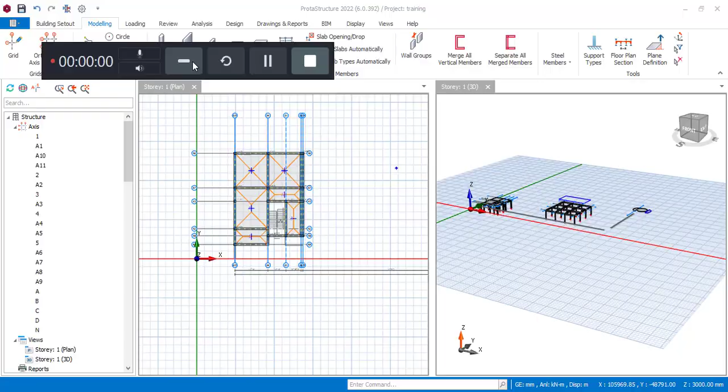On this episode, I'm going to be showing you how to insert your stories, the number of stories to specify whether it's a 2-story, 3-story, 4 stories, like that, and also how to edit these stories and how to generate your members to other stories. So I'm going to be taking you through that process right away.

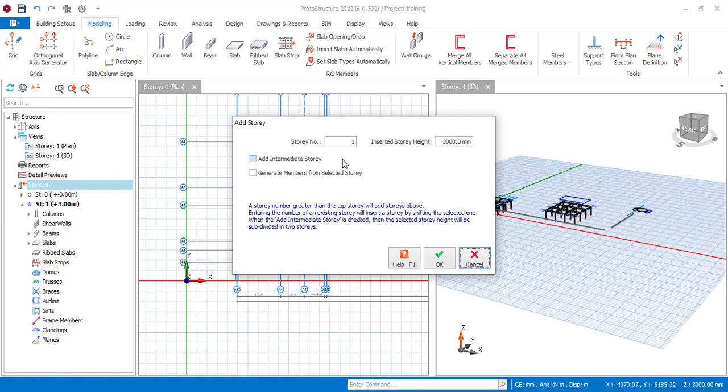So to insert your story, all you need to do is to click on this story, and then you right click, then you click on insert story. But now ProtaStructure sees your ground floor as story 1, it sees your first floor as story 2. So for us to design one suspended floor, we have to type in 2. So it's going to interpret this story 1 as our ground floor and story 2 as our first floor.

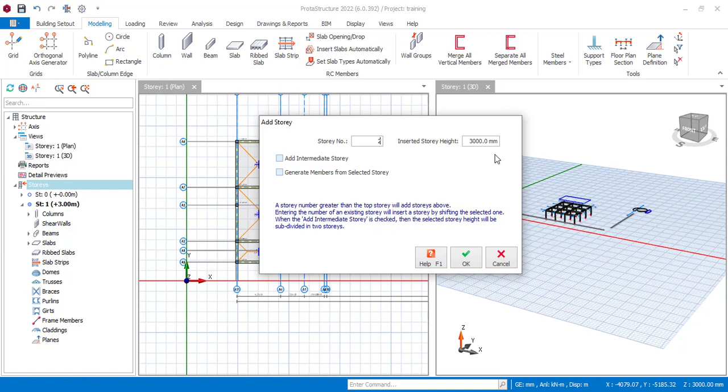Okay, so add intermediate story, generate members from selected story. I'm going to be showing you that as we proceed in the training. Okay, so I will click on OK and I will click on yes. So once I click that, you can see here it's showing me story plan, story 2 plan. Okay, so I will double click on story 1 to bring back that model which we have done. It's actually in story 1.

Now if I click on these stories and I right click, I can come to edit story. When I come to edit story, I can specify the depth of my foundation. Now mind you, the depth of your foundation comes mainly from the soil report, which will determine how deep you are going with your foundation, or sometimes based on the number of stories.

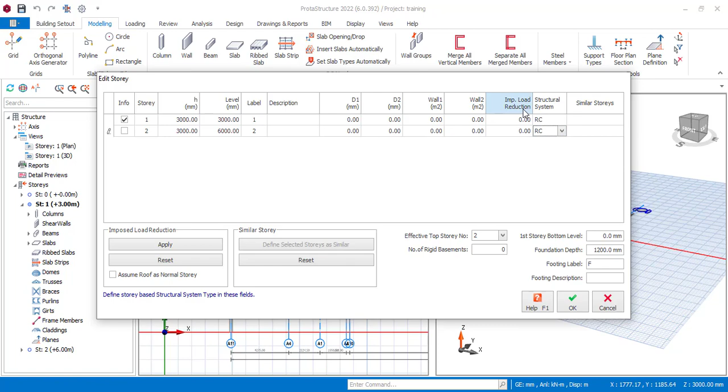But this building, mind you, is a reinforced concrete building, and that is why we are leaving the structural system as RC. Here also the structural system is RC. Okay, so I will just click on OK. Once I click on OK, it brings me back here. You can see I'm still on story 1. I can generate all of these members and take them to my story 2.

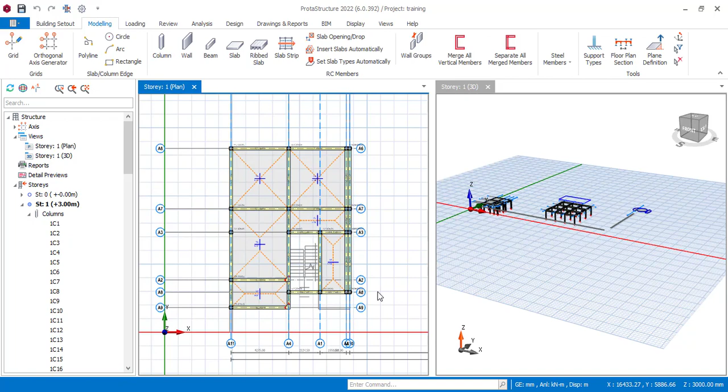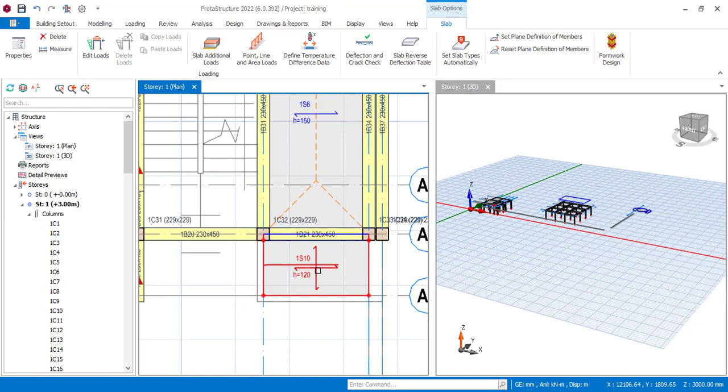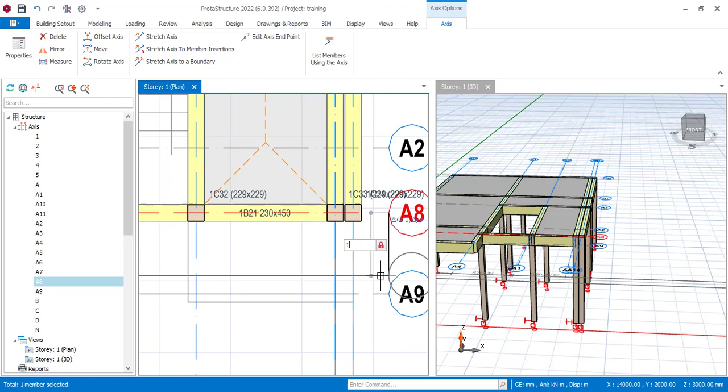But then let's say, what if I have maybe a small cantilever here? I can introduce that. Let's say this is a cantilever. I can insert a slab here, simply just insert this, and then I have my cantilever. Here we go. You can see it here. However, there are so many ways to achieve this, because there are cases where it may not be as large as this, or where the width of this cantilever is just, let's see, 1000, for example.

Mind you, whenever you want to offset, make sure you take note. If you are going down, it's always negative, so it's going to be minus 1000, and then I will type in and click enter. Now you can see what I have here. Minus 1000 is what I have here, so I can simply just insert.

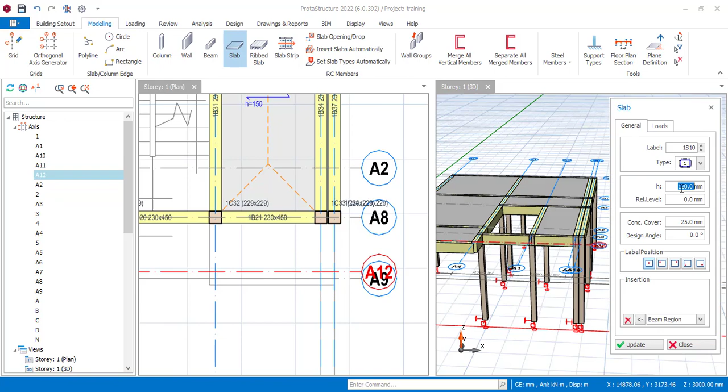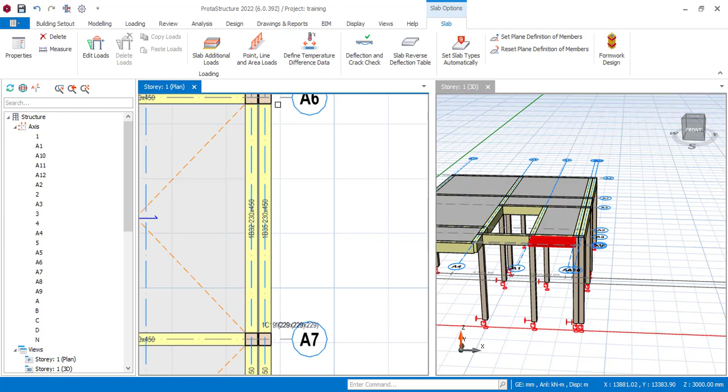Now it's easier for me to insert here because I have this bounded here, because I have axis here, I have a grid here, I have grid here, I have grid here. There are cases where you may not really have grids bounded in this way, and in that case it may become a bit more difficult or more complex to achieve your axis.

In that case, you can achieve it in so many ways. Actually, you can as well just stretch this, you know, it's a model. You can use the software to actually do modeling. And in the place of modeling, the pattern you may adopt may be different from what I will adopt, but the basic thing is for you to have the proper result, okay, which is the major thing.

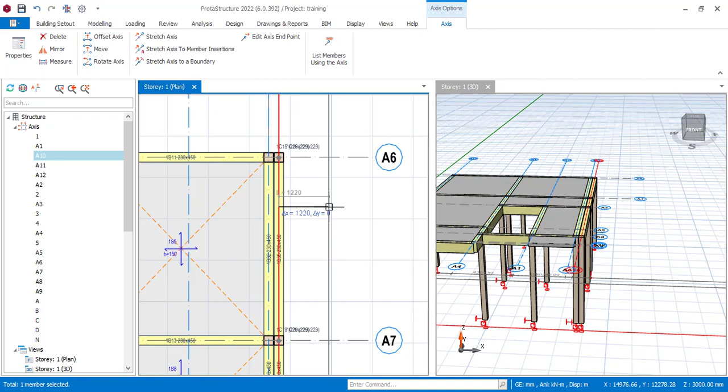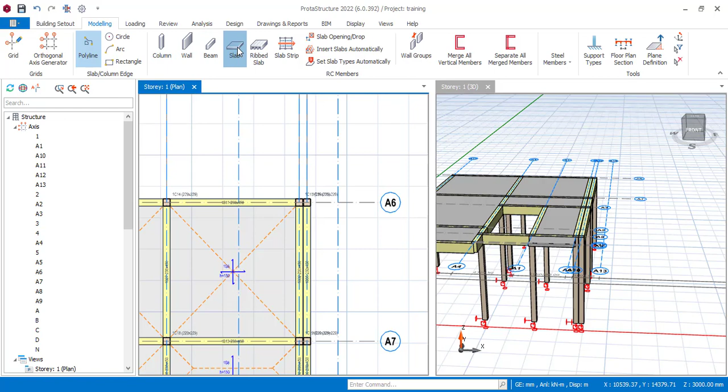Okay, for as long as your modeling is right, the software will be able to interpret it properly, analyze it properly and design it for you. So you can achieve that. But in a case where I encounter a more complex one, I'm going to be showing you while we still proceed in the training. But you can see all of these still look very simple and easy to insert your cantilever. It's as simple as that. You can just insert this as a cantilever. Okay, so that is that.

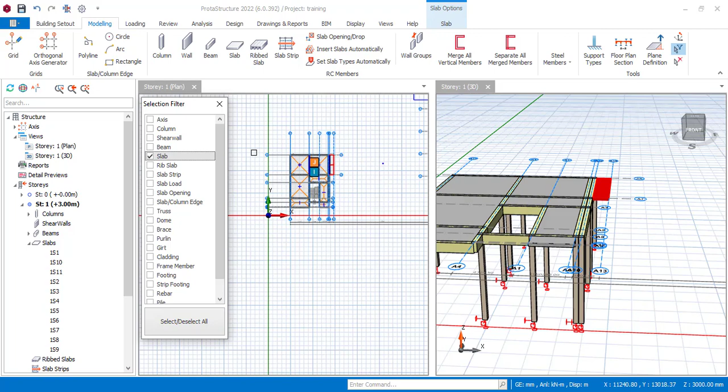Now you can see we have inserted new panels. All you need to do, just like what we did earlier on, you can just come to your filter and just filter only the slab, and then go back and rearrange them from your review. Here you can click on relabel and just relabel it again.

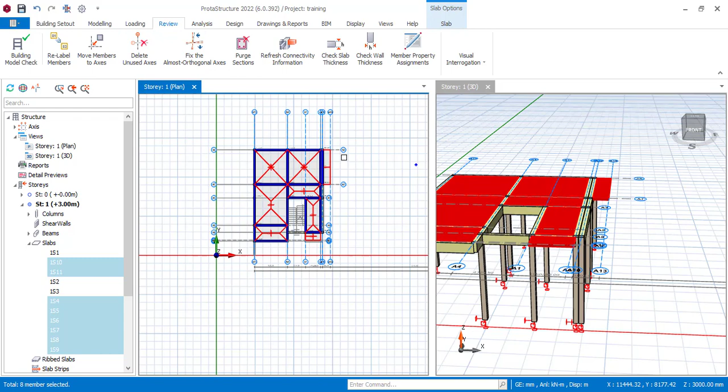As simple as that. All I need to do now is to select, sorry, the problem with this is one area ProtaStructure really needs to work on. This thing doesn't go off; once another window pops up, it will never go off until you close that window and go back and close it. So I can relabel my slabs so that it will rearrange it for me, because I just introduced some new panels.

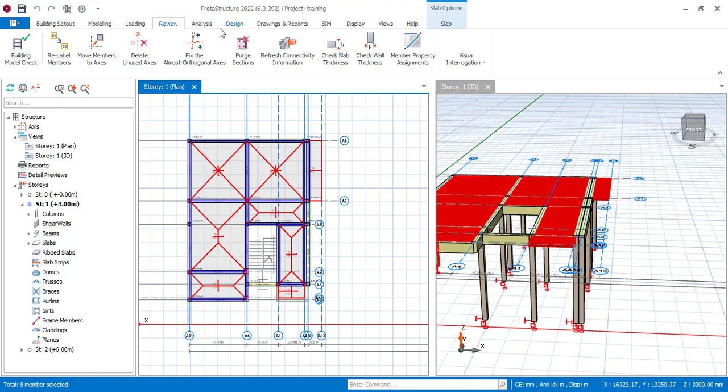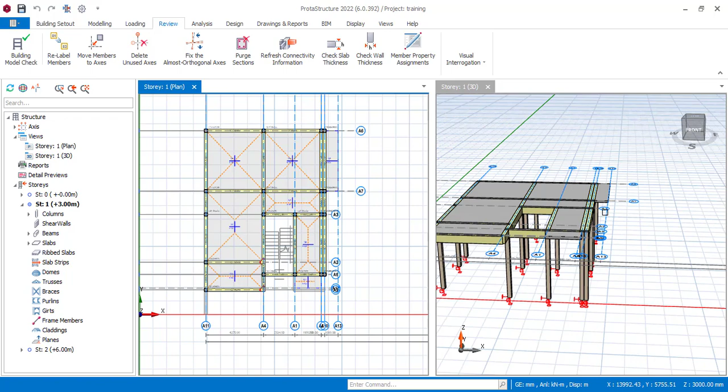Okay, and I can as well come back under this slab here and click on set slab, and I'll click yes. So it's going to rearrange them and then specify it based on the boundary and all of that. Okay, so this is our model. I can generate this to the top story by right clicking on them, and then I'll click on generate members to story 2, and I'll click on OK.

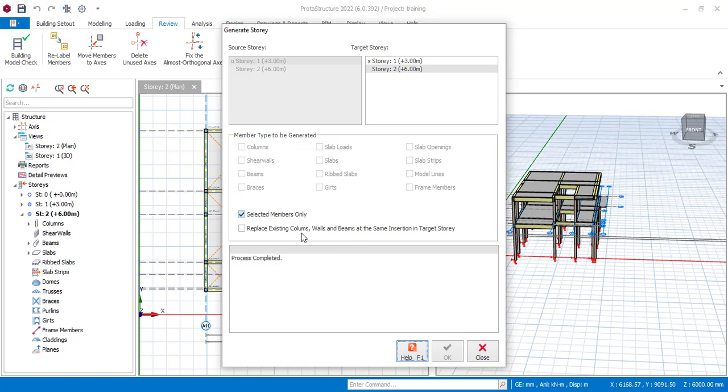So you can even specify the members you want to generate. You may probably not want to generate all the members. It's difficult, you can't really undo, but all you need to do is just to select those members that I don't want to appear here, and I will delete them. So let's say I don't want this here as well, delete it. Okay, nice.

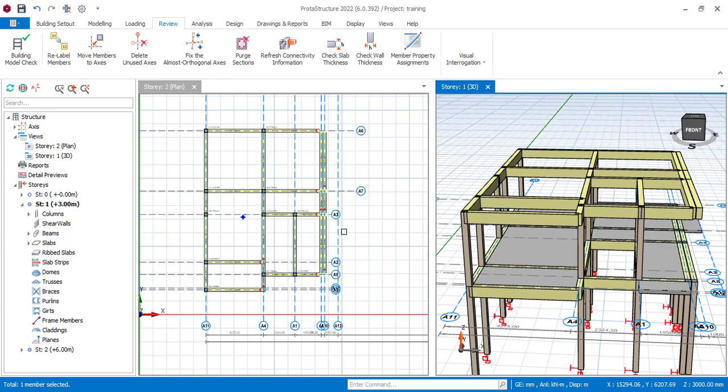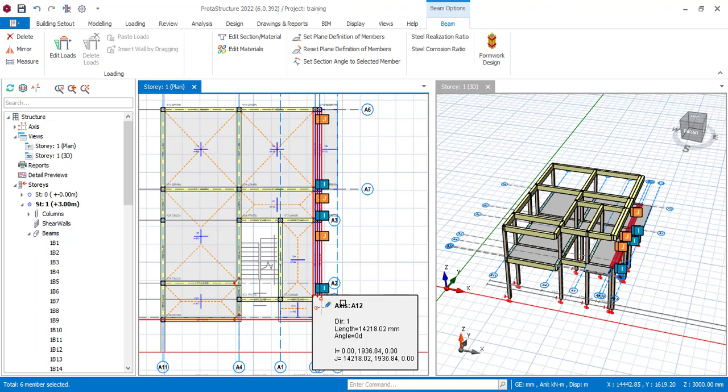Okay, that's very good. You can see that some of the columns here were not generated because I believe they were not properly highlighted. So I'll come back to story 1 and make sure I'm highlighting these columns as well. So let me come to this filter, make sure it's not on. Okay, only my slabs. That is the reason why I'm having that issue. So I can come back and regenerate.

If I click on generate members to other story, if I click on story 2, you can see select members only. I can select the particular structural member I want to generate to the other story. So I don't have slab opening, I don't have slab strip yet, because I don't have rib slab here yet. I don't want to generate slab to the top story. There is no brace, no shear wall, but even if I leave it, it doesn't have any effect, because I don't even have it in the model.

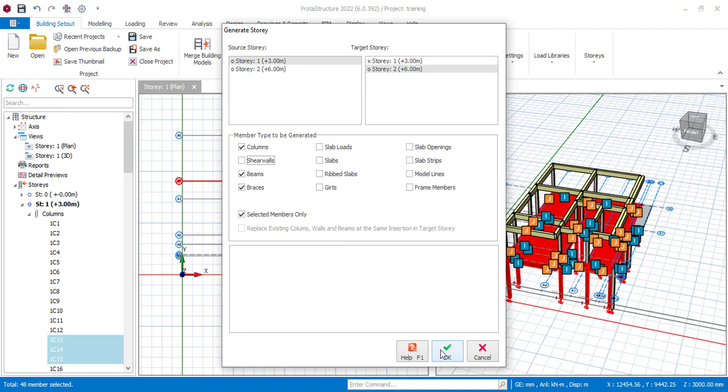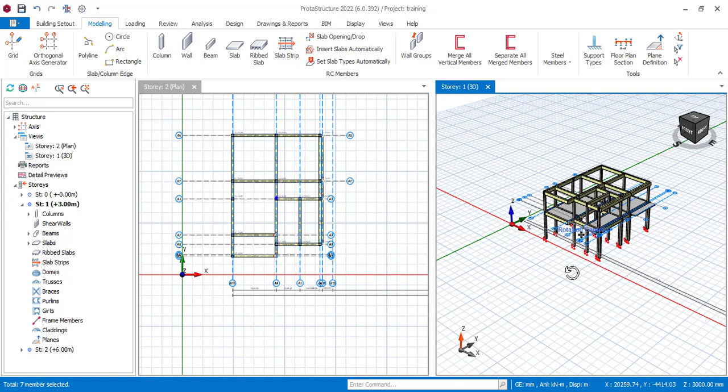So if I leave all of this and I click on OK, it's going to generate only these structural members that have been highlighted, although there is a mistake here. I will delete them manually. Okay, so this is my model, but if you check this model very well, this is 230 by 450 depth. The one for the roof is also 230 by 450 depth, which is not economical. Your roof beam is supposed to be

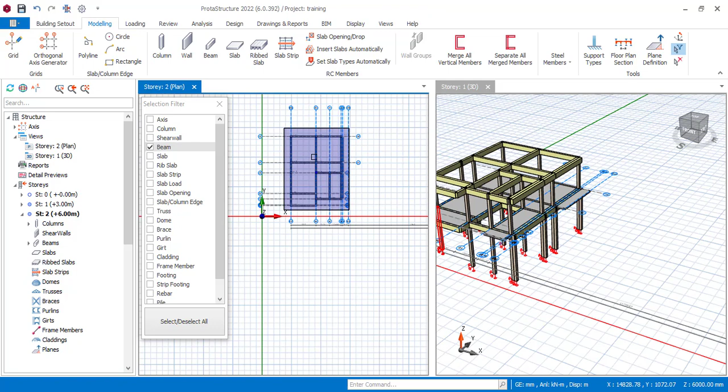230 by 300. So if I select only the beams and highlight all my beams, I will right click on it, and I'll come to the property. It's going to pop up the property for my entire beams. Like I said, this is one of the issues I have with this software. They need to really work on it. But if I click on this at the top here, and I click on this one that looks like a pencil, I can highlight and change the entire depth of my beams at that story.

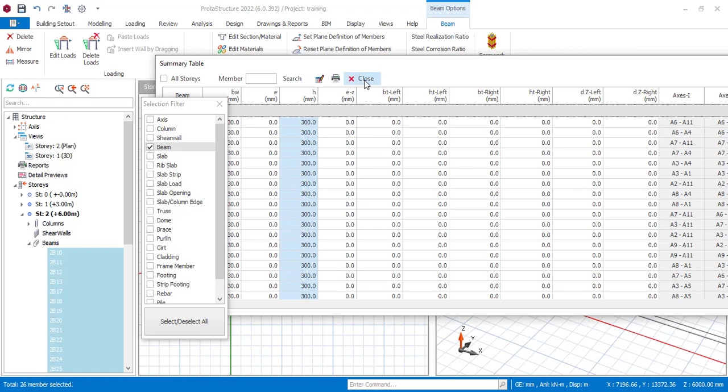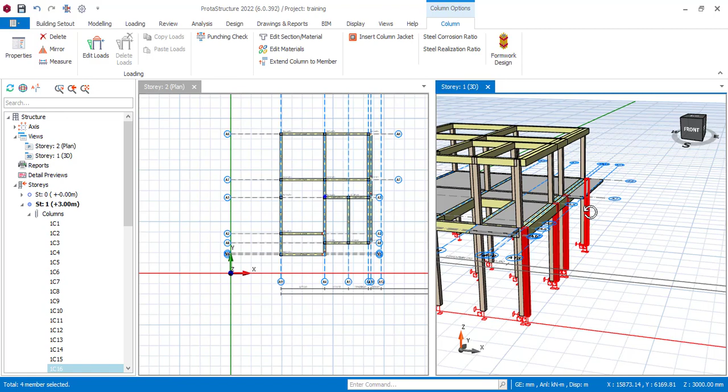So I will select everything back and bring everything back to its normal layer. But if you look at this, I think even at this point some columns are still not generated. So you can see I can manually select them from the 3D model as well, and just right click. So the software is very interesting, user friendly. Okay, so if I click on story 2, click on OK and click on yes, you can see those members have been generated to the top story.

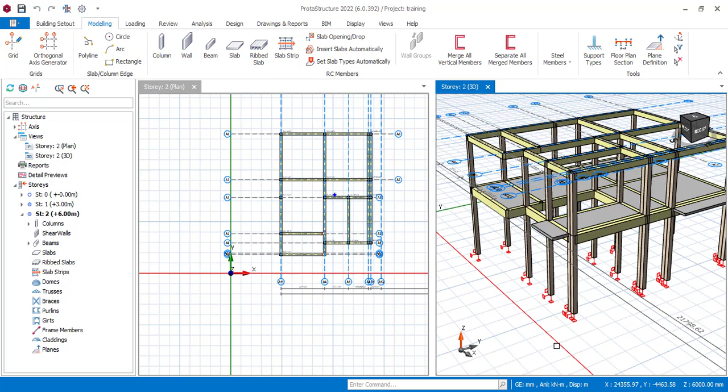So in the next episode I'm going to be showing you how to insert the wall load. Okay, so we are going to be inserting our wall load in our model. Okay, so make sure you stay safe.